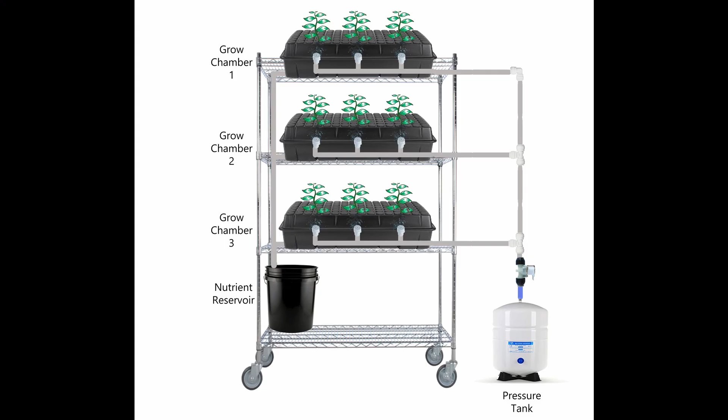There are various high pressure aeroponics designs that you can use for various systems. One is a vertical stack system, which is my favorite. Or you can retrofit a tower garden to use high pressure aeroponics. How about a wall garden using high pressure aeroponics? That's cool. For larger plants, you would need a bucket system to use high pressure aeroponics.

Maybe your fancy is to grow microgreens with high pressure aeroponics, or maybe you need to do some cloning with high pressure aeroponics. All these systems are great for high pressure aeroponics. However, each one requires a different design and setup. You can go about the design through trial and error, trying out this, trying out that until it works. Or you can do it the smarter way by using calculations and formulas to figure out the right design.

Before now, that's what I did. That method is now obsolete. You can now use the Online Aeroponics Calculator to design any high-pressure aeroponics system. It can be the vertical stack system. It can be a wall garden. It can be a tower garden. Or it can be for a large bucket system.

This new calculator will save you days, months, or loss of your crops just trying to figure out what will work. You will know before you invest your money and time that the system will work the first time. Here it is, the first ever aeroponics calculator released to the world. This will be a quick review of what the calculator can do for you and how to use it. In future videos, we will explain in more detail how to use the calculator.

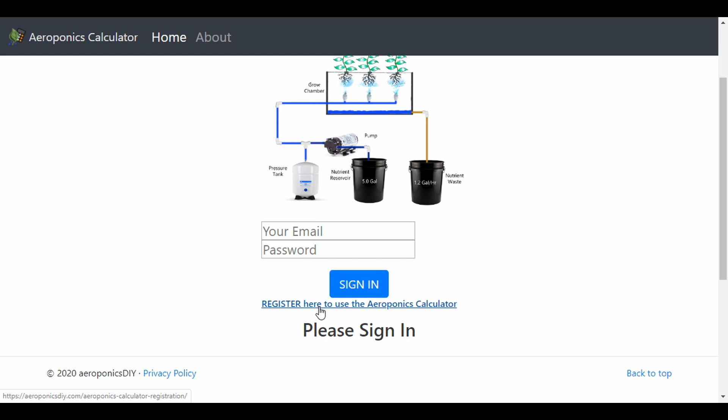Okay, first let's go through the login process. If this is your first time logging in to the aeroponics calculator, you would need to click right below where it says sign in, click on register here to use the aeroponics calculator, and this will create a new account so that you can use the aeroponics calculator. This will take you to a new screen, and in this new screen you can enter your email address. So be sure to enter your email address here.

After you enter your email address, make sure that you click on Aeroponics Calculator Access. This screen is telling you to check your email. Make sure to check the email that was sent, because it will have the password to access the aeroponics calculator. Please give the system some time to process your registration. It might take 5 to 15 minutes before you see an email. If you don't see an email within that time, be sure to refresh your email folder or check your promotional or spam folder to make sure that the email didn't go there.

Okay, so this is what you will see when you open that email. It will have the username for the login, which is the same as your email address, as well as the password to access the Aeroponics calculator. When you're done there, you can click on this link to access the calculator, which will basically take you back to where you started. Please note what happens to the menu bar here when we enter the right registration password.

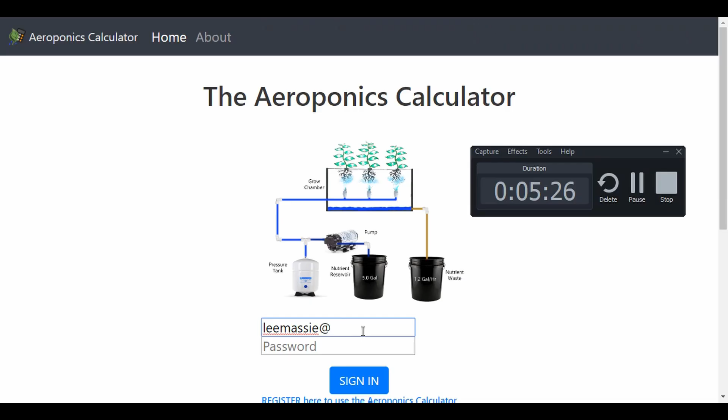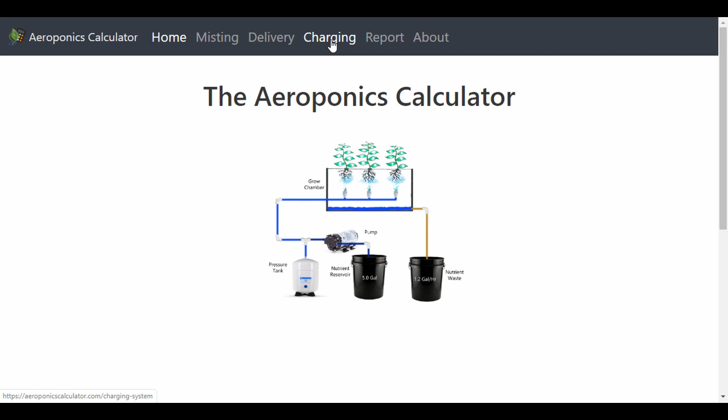Then click on sign in. And then right away you can see now you have access to all of the systems. If this is your first time using the Aeroponics calculator, I recommend that you first start with the misting system. After you complete the misting system, then move over to the delivery system. After you complete the delivery system, then move over to the charging system. Currently, the report is not available.

Okay, so let's start with the misting system. Please notice that I preloaded the calculator with some standard values to assist you in filling out the fields. If you don't know what to use in that field, just leave the defaults for now. You can always change these defaults in the future, and the calculator will automatically update all the values because this calculator is dynamic. The first value that we want to enter into this field is the nozzle flow rate.

Now remember, nozzles have different flow rates at different pressures. For us, we want to use a standard pressure of around 100 psi. So look at the manufacturer specifications and find out what the nozzle flow rate is at around 100 psi. Here you can see that I use a standard flow rate of 0.025 gallons per minute, and this would be at 100 psi.

The next field to address is the working pressure range. Here, your working pressure range is what pressure your system will run at. What's the minimum pressure it would be operating at, and what's the maximum pressure it would be operating at. This value is mostly governed by your pressure switch. Look at the specification of your pressure switch.

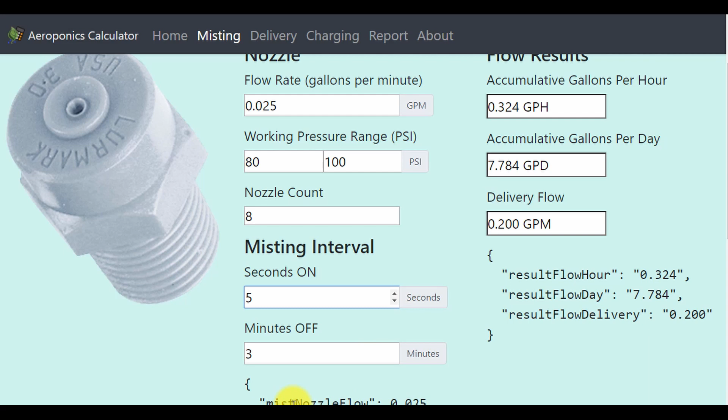But for your system, it could vary. Maybe what you're trying to grow requires very little misting. So maybe you might have only 1 second of misting. Or maybe whatever you're trying to grow needs a longer misting interval, then you might mist for 10 seconds. Okay, but for now, this is a good starting point of 5 seconds of spraying and then 3 minutes of no spraying. So basically, this completes all the input values for the misting system.

So based upon these values, we have some results. And with those results, it would tell you a story about if your system is adequate or not. Okay, so now let's look at the results, which is on the right side.

So our flow results, we see that our cumulative gallons per hour is 0.324 gallons per hour. What does that mean? That means that in 1 hour, how much nutrient are we using? We're using basically just under 1/3 of a gallon per hour. Now, we also have our cumulative gallons per day.

So in this scenario, with these input values, we are using 7.78 gallons per day, or basically we're using roughly 7 3/4 gallons per day of nutrient. And then our delivery flow is 0.2 gallons per minute.

Okay, so what does this mean? Well, this means that if we wanted to store nutrient for 24 hours, we would need at least close to 8 gallons of nutrient per day if we wanted to just use the nutrient once. That means that we need to have at least an 8-gallon reservoir. Okay, but if you are recirculating the nutrient, then this number is not as important.

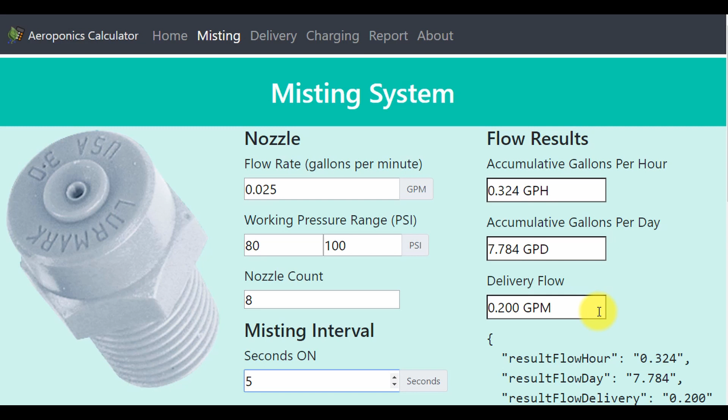Okay. Second is the delivery flow. Now, delivery flow here is 0.2 gallons per minute. So this means that at the time when your solenoid is energized, you have 0.2 gallons per minute flowing through that solenoid, through all of the tubing to reach those nozzles. In this case, 8 nozzles. So the flow rate to deliver nutrient to those 8 nozzles in this system will be at 0.2 gallons per minute. So that completes the misting system.

Now let's go over to the delivery system. So in the delivery system, the first thing we need to enter is the inside diameter and the length of the tubing that we are using to feed our nozzles. Now, when it comes to choosing your tubing, you don't want to choose tubing that has a very thick wall, and the reason why is that your inside diameter will be smaller. So we want an inside diameter that's not too much smaller than the outside diameter of the tubing.

So for most of us, we are using the 1/4 inch tubing, and the inside diameter of a standard 1/4 inch tubing is 0.142 inches. Okay, so that would be taken off of the specifications from the tubing that you purchase. So normally they would give you the inside diameter of the tubing so that you can enter it into this calculator.

After you input the inside diameter, then we need to know the total length of the tubing to the furthest nozzle. Now this picture is only for illustrative purposes. In here you can see that our worst case scenario is the tubing on the very top rack. We have 3 nozzles here. So which length will you use? We want to use the length to the furthest nozzle. So we start from the pressure tank, measure the length of the tubing along this path, going up here, and then on this 90, all along here to this nozzle here.

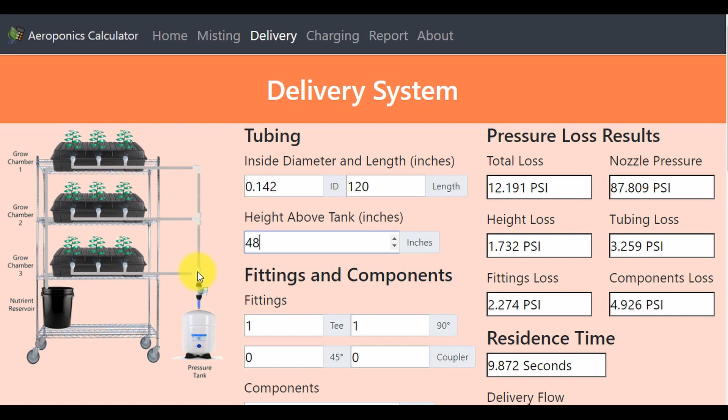And then we have 2 T's. We have a T here and a T here. Okay, so we have 2 T's, and then we have also one 90 here. So let's add our 2 T's. So in here we have a T, so let's add another T, and then over here we have one 90, which is already 1. So that completes the fittings and the components, and these are all the input values that we need for the delivery system.

Now let's look at the results based upon this configuration. Okay, so now let's go through the results of the delivery system. Now here we have the total loss. So what is the impact of this configuration and setup to our system? This is saying that this nozzle right here, the pressure drop from the tank to this nozzle is roughly 13 psi. Okay, so that's the total pressure drop. So that's the worst case scenario for this nozzle.

So what this means is that this nozzle here has a pressure delivery at 86.6 when we are at 100 psi. So this system will function adequately, knowing that we will have at least 86.6 psi pressure at this nozzle.

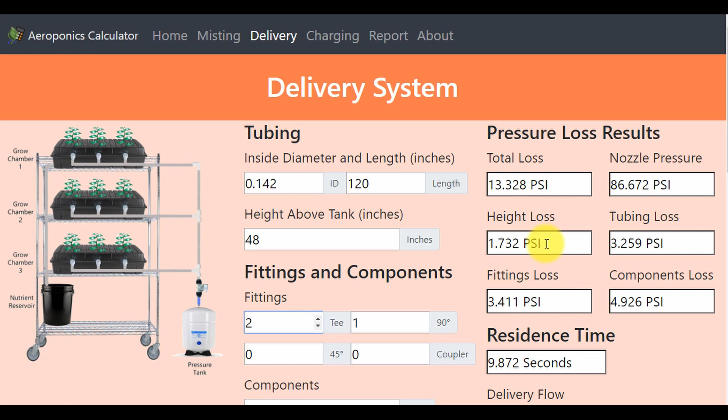Now let's say you want to refine the system, that maybe you want this here to be higher, you want more pressure at that nozzle. So what can we do? Well, that's the purpose of here. So here is saying that the loss due to height is 1.7 psi. So I wouldn't try to modify that too much to get more psi at your nozzle. Here is saying that the loss through all your fittings is 3.4 psi. We're losing that much pressure because of the number of fittings that we have. That's not really a big count either.

And same thing here, component loss, we're losing 4.9 psi. And then tubing loss. Now this is the loss, the pressure drop in the tubing. So we're losing roughly 3.25 psi due to the tubing. And this is basically the length of the tubing and the diameter of the tubing.

So notice what would happen if we cut this length of tubing in half. So say we have now 60 inches. So I change this to 60 inches. You notice now that we have decreased the tubing loss to 1.6. So we basically cut it in half, right? That's because we actually cut the length in half. That means that we cut the pressure loss also in half.

So now our nozzle is running more at 88 psi. So from here to here, we can say that we would have to reduce the tubing length in half if we want this pressure to rise to 88. So that gives you kind of an idea. Now let's go ahead and change this back to 120 inches.

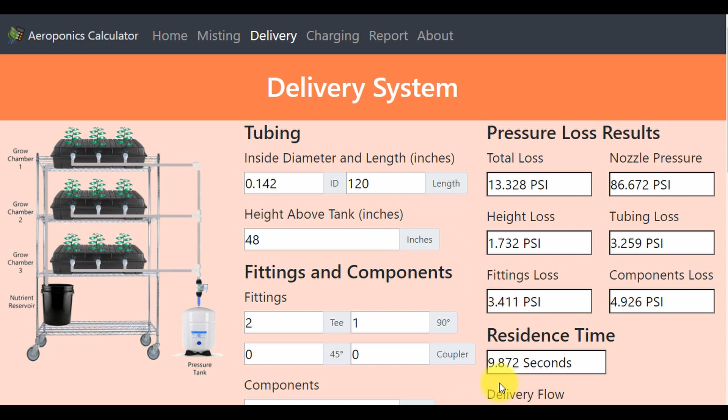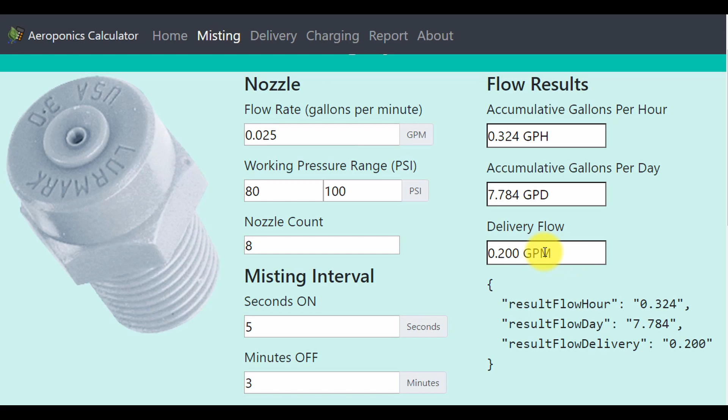And then the delivery flow is just a carryover from the misting system, which is 0.2. And so over here on the delivery is also 0.2. So that's just a carryover. And the reason why is that that flow rate is used in the calculations in the delivery system. Okay, so that completes the delivery system. Now let's move over into the charging system.

Now the charging system consists mainly of two things: your pump and your pressure tank or your accumulator. These values here you can get off of the pump specifications. So make sure that you choose the specification that relates to the max amount of pressure that your pump will deliver. So in this scenario, our discharge pressure, which is the pressure that the pump will reach, would be at 100 psi. And then you have to know for that pump what's the flow that it will deliver at 100 psi. For this pump it is 0.6 gallons per minute.

So it can move 0.6 gallons per minute at 100 psi. So make sure you get that right from your pump specification. And then this pump uses 24 volts. And at 24 volts with 100 psi, it requires 2 amps. So you would notice that the higher the pressure, the more amps the pump will pull. So this is just for illustrative purposes. Let's say that we want to run at 150 psi. So maybe that might increase our pump amp average by 50%.

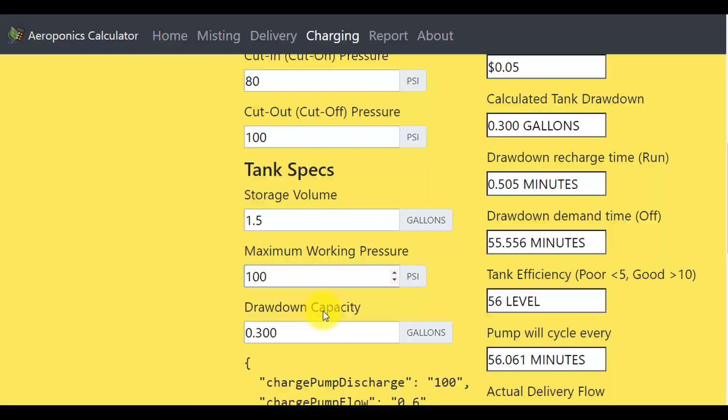And then here we need to input the maximum working pressure that your tank can operate at. So for here, we will put 100 psi. Okay, and then this is the drawdown capacity. Now the drawdown capacity can be calculated based upon the values that were already entered. So right now, this value is not used, but will be used in the future if you wanted to override the calculated drawdown capacity. So right now, don't worry about the drawdown capacity.

And what is the drawdown capacity? Well, the drawdown capacity is the amount of gallons that the tank will deliver between the cut on and cut off values of your pressure switch. So at 100 psi, how many gallons will need to exit the tank before it drops to 80? The amount of gallons that will deplete from the tank between 100 and 80 psi is what the drawdown capacity is.

Now, it doesn't seem like it, but this section definitely requires a dedicated video explaining the charging system, because this system is one of the most complicated when it comes to the number of calculations that are performed to generate the results.

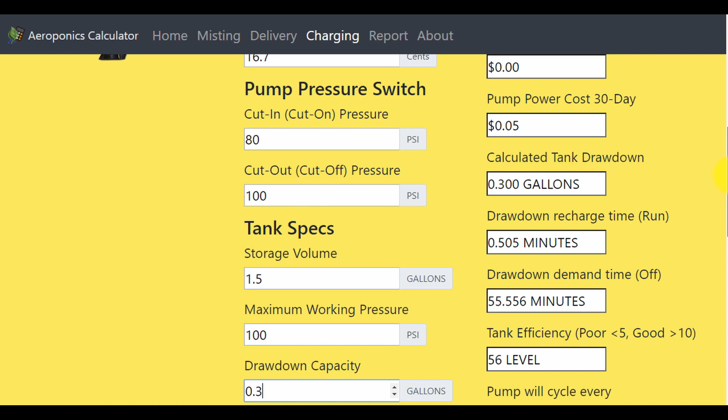Now I have a warning to give you concerning the charging system. As we mentioned, all the numbers came off of the manufacturer's specifications. That means that the results of this page concerning the charging system are based on calculated values, not on the actual values. So how much trust can we put in these numbers? What I have come to discover after using this and knowing what a true system performs at, these numbers are not realistic. And why is that the case?

What's going on here? Why, even though we're using the manufacturer's specification, are we not able to accurately calculate the flow capacity, the runtime duty cycle, the pump power usage, the pump power usage per day, the pump power cost per day, the pump power cost for 30 days, which is a month, and also the drawdown recharge time? Because these are all based upon calculated values.

There are three reasons why we cannot depend upon the calculated values to determine the amount of power that our pump will use or how the performance will work in our system. Number one, the specifications are inaccurate. There can be various reasons why. It's possible that the pump testing conditions are not exactly a replication of what we have in our high pressure aeroponics system. So the specifications are only laboratory true, not real world true.

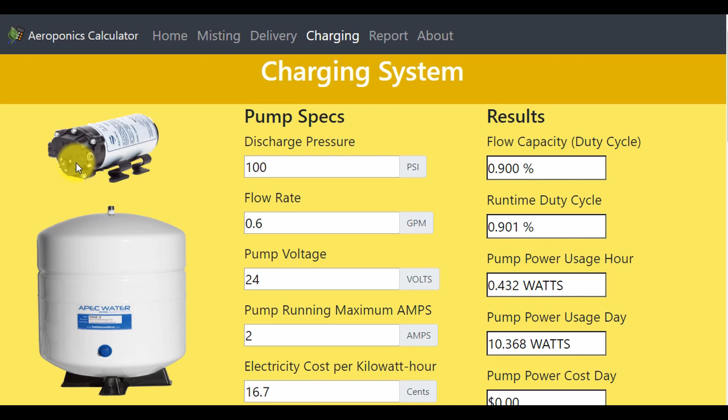This problem with the actual and the calculated values not correlating with one another has led me to another solution to this problem. Why not add actual measured results to our Aeroponics Calculator? That means that our calculator will not only represent what's calculated, but it will represent the real environment. Then you can compare the calculated values with the actual values and come up with the correlation factor that you can use for all of your future designs. So based upon the brand of pump you're using, everyone's going to be different, okay? If you're able to compare your calculated values with the actual values that you are measuring, and the aeroponics calculator can take those values in, then you can come up with your own correlation factor for that pump.

So what I'm saying here is that the aeroponics calculator can be used to monitor your system in real time. You would know exactly what the cost would be in operating your high pressure aeroponics system when it comes to electricity, water usage, nutrient usage, as well as the amount of seed that you're using. So all of your inputs as well as the outputs will be monitored. So you would know exactly what that head of lettuce costs you. There would be no guesswork. When it comes to selling your product for a profit, you would know that head of lettuce costs you 50 cents to grow. So you know exactly what your profit margin is. As I said before, there will be a future video to explain the charging system.